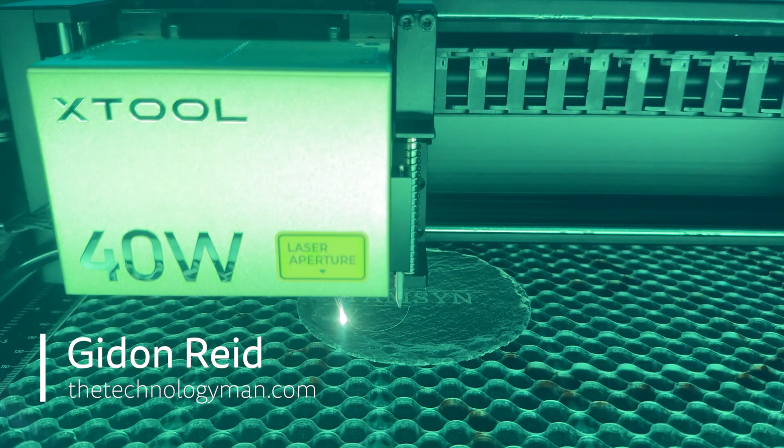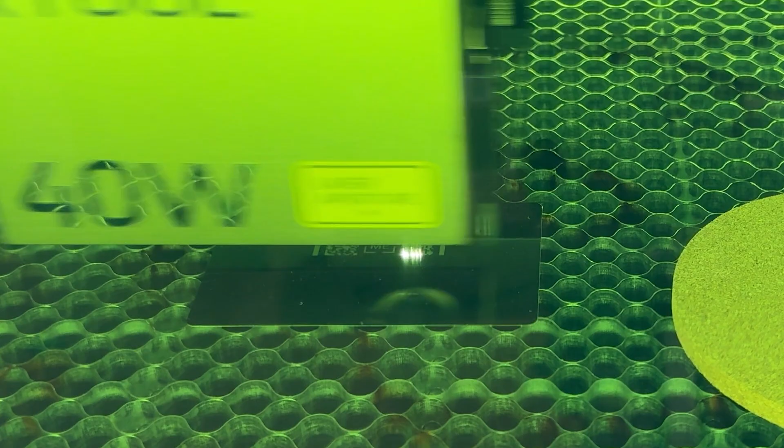The xTool S1 40W is the most impressive and safest laser I've reviewed so far. It can cut wood up to 20mm thick and engrave at 36,000mm per minute or 600mm per second. And the laser module can move up and down on a motorised Z-axis, which combined with its built-in touch probe provides autofocus and a few other clever tricks.

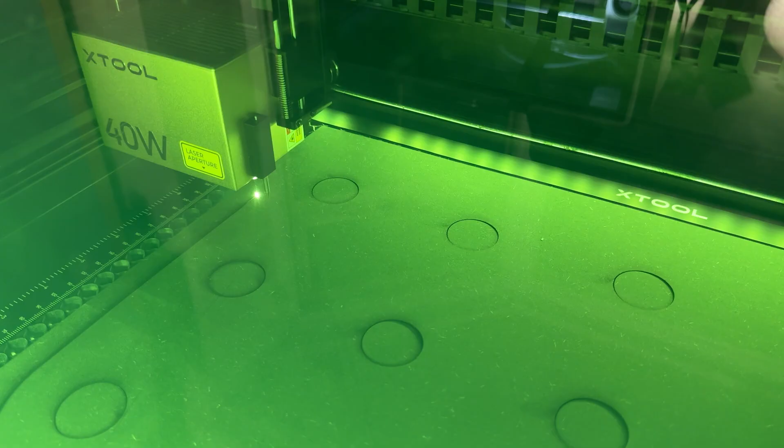Its integrated enclosure can only operate with the lid closed, giving us a Class 1 laser classification, comparable to a laser pointer you might use for presentations. And the enclosure has built-in fume extraction. I'll also be reviewing the optional xTool Air Assist, honeycomb bed and riser base.

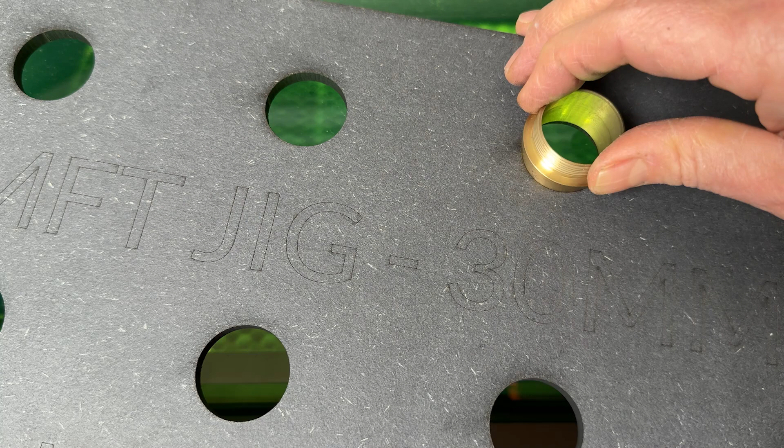I'll put all xTool's claims to the test and show exactly what this machine is capable of to see if it might be the right laser for you. So let's take a closer look. The xTool S1 comes in a large box, very well packaged and almost completely assembled. You should be up and running in 30 to 60 minutes.

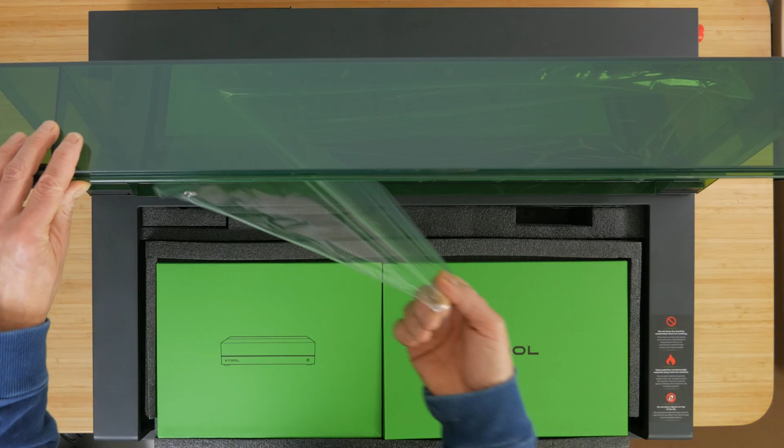I'd recommend following xTool's unboxing video, but there's also a nicely produced full colour A4 user manual in the box. There are two wide Velcro straps that you use to extract the entire machine from the packaging. All the extras are contained within boxes inside the machine itself. There is some very basic assembly.

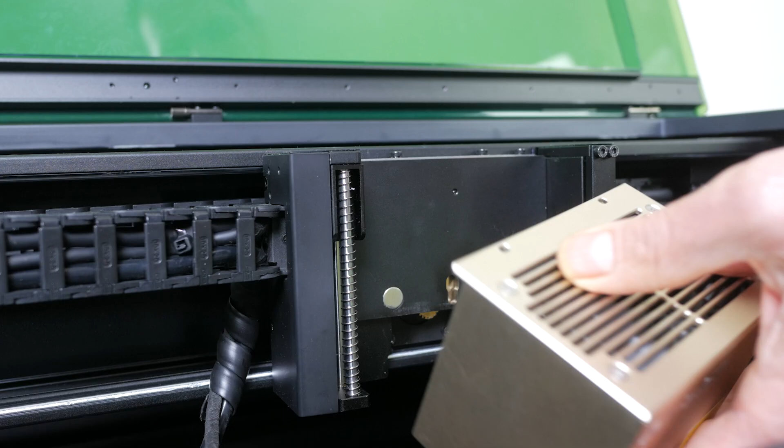First you need to remove the two back side stops to prevent the gantry moving in shipping. Then you can attach the laser module, which is held in place with two bolts. Plug in the cable and air hose to the laser module and attach the autofocus depth probe, which snaps into place with magnets, so it can easily detach itself in case it gets snagged on anything.

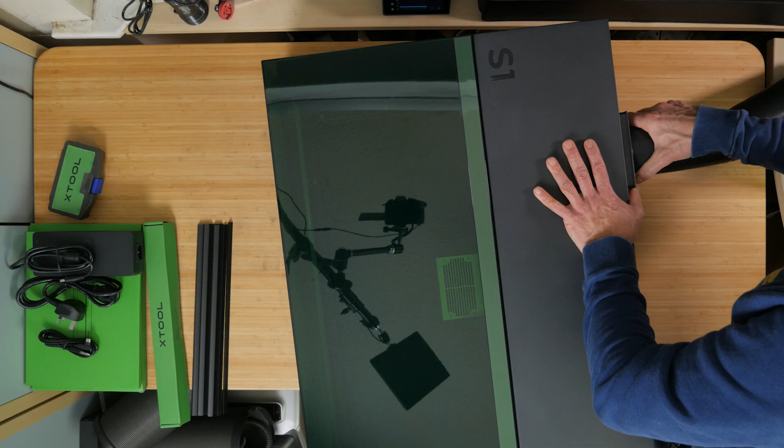You can then remove the fan cover to install the included 76mm flexible hose and adapter in its place. This hose is only around 1 metre when fully extended, which is a little on the short side. If you have a window close enough, you can use this hose to exhaust smoke out of the window. I'll discuss other options shortly. You'll definitely need some sort of fume extraction if you're going to do any cutting with the S1.

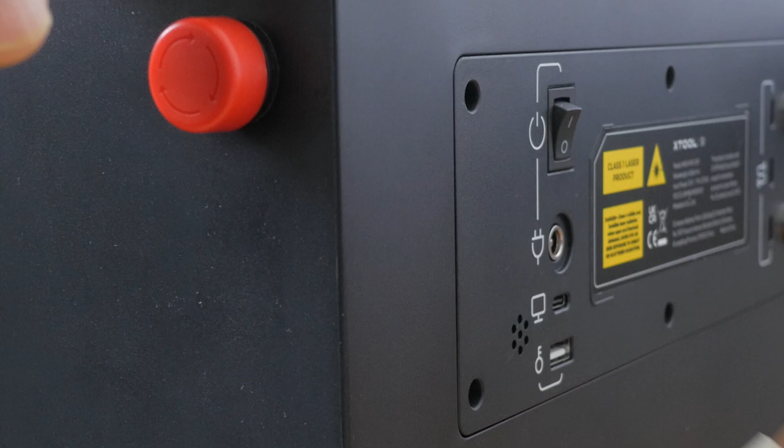Finally, you can install the USB key around the back, plug in the hefty 275 watt power adapter, release the emergency stop button and turn the machine on. You won't be able to operate the machine without the USB key in place. Luckily, xTool does provide a spare.

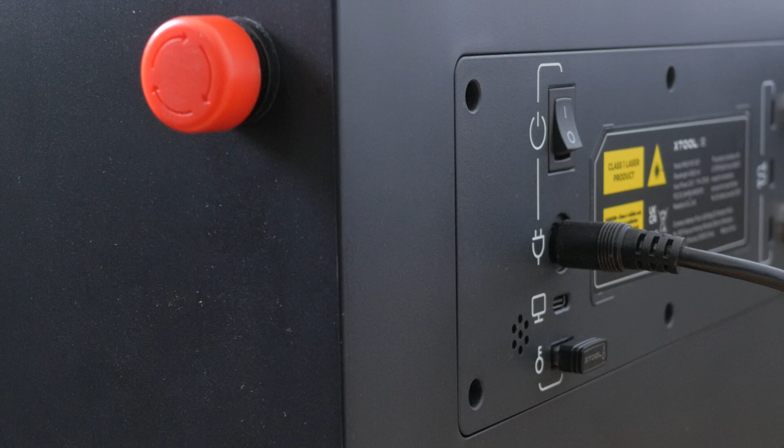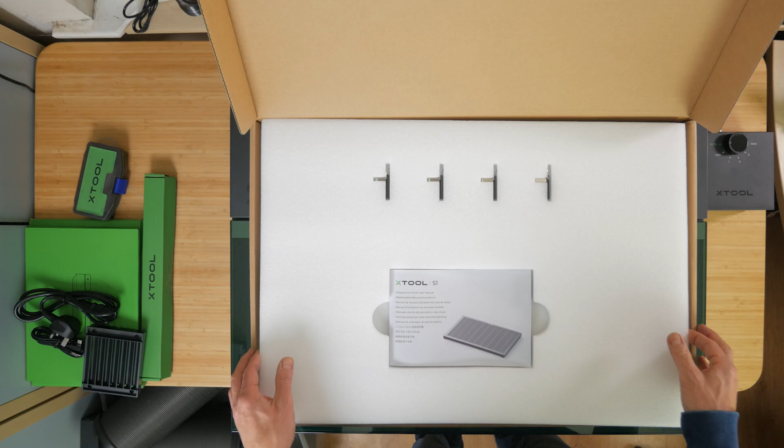The machine also comes with a small pack of material samples, 2 spare lenses, a hex screwdriver, some grease and a set of triangular prisms to use when cutting if you don't have a honeycomb base. My machine bundle did come with a honeycomb base as well as the air assist pump and the riser base, which I'll discuss shortly.

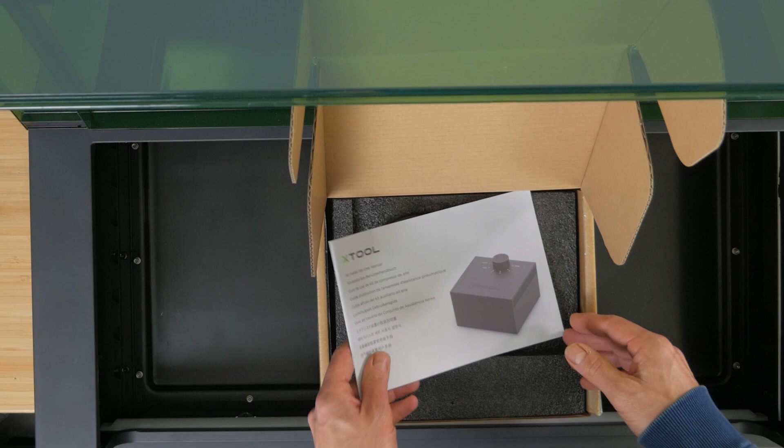I'd consider some sort of air assist essential for cutting, and even for engraving it keeps the laser lens cleaner. This is the smartest looking air pump I've seen and plugs directly into the machine. It doesn't need an additional power supply. It would be even better if the pump was somehow integrated into the machine though. It uses a standard 6mm hose, so you could use another pump if you have one, but you'd lose the automatic features of the xTool one that I'll come back to.

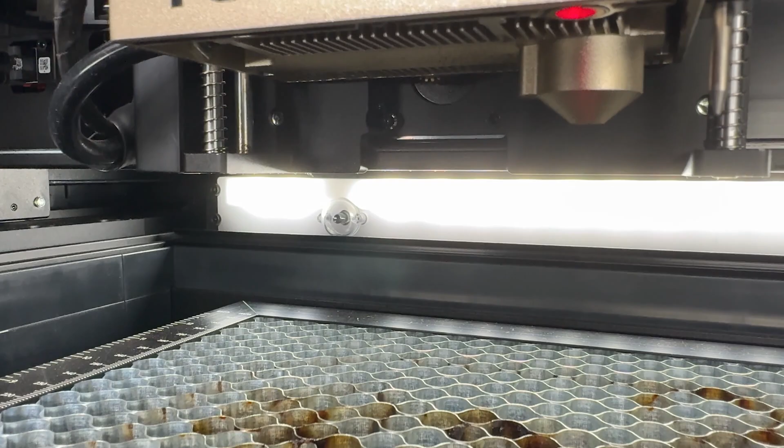The power cable for the air assist looks like a USB-C cable, but it's a proprietary connector and has to be inserted the right way around. This is a very attractive looking machine and has bright LED lights at the front and back that are useful for positioning your materials. The cabling is immaculate and all tucked away neatly, a far cry from some diode lasers I've tested in the past.

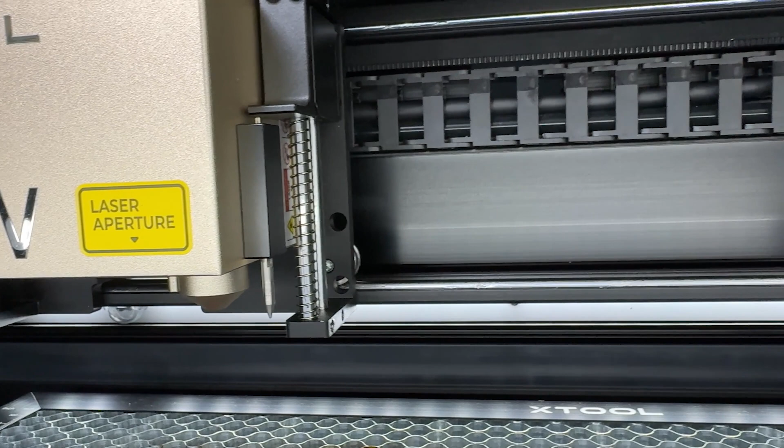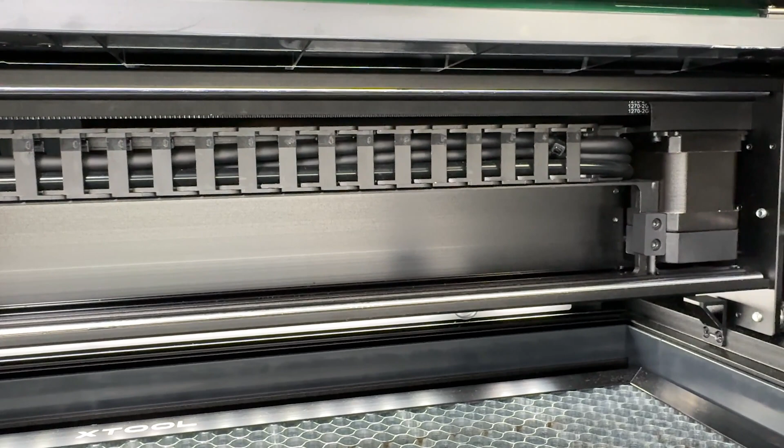You can use the S1 with xTool's free XCS software or Lightburn if you're prepared to lose some functionality, which I'll mention as we go. I tested the S1 with both, but I'd recommend at least starting off with XCS. Apart from anything else, you'll need to connect it to XCS for firmware updates.

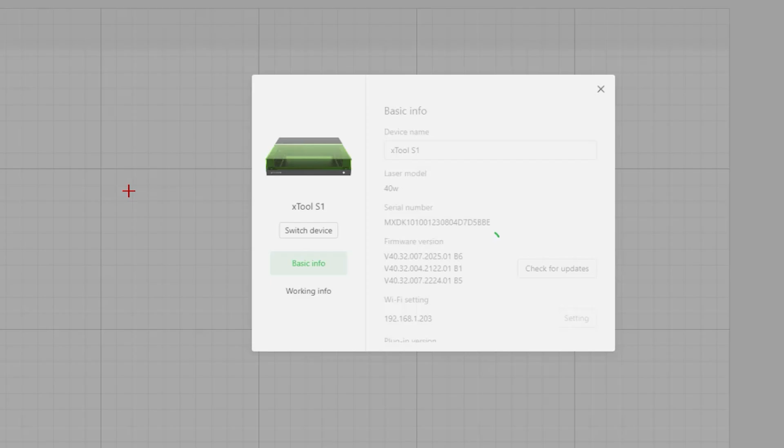Connect the supplied USB-C cable to your laser and computer and open up XCS. Click on Connect Device in the top right and accept any firmware updates. At this point you can switch the machine to use the S1's built-in Wi-Fi from the settings menu. Most of these settings you can leave at their defaults, but I changed the exhaust time after processing from 10 seconds to 30 seconds to give the machine as much time as possible to clear any smoke and fumes before you open the lid.

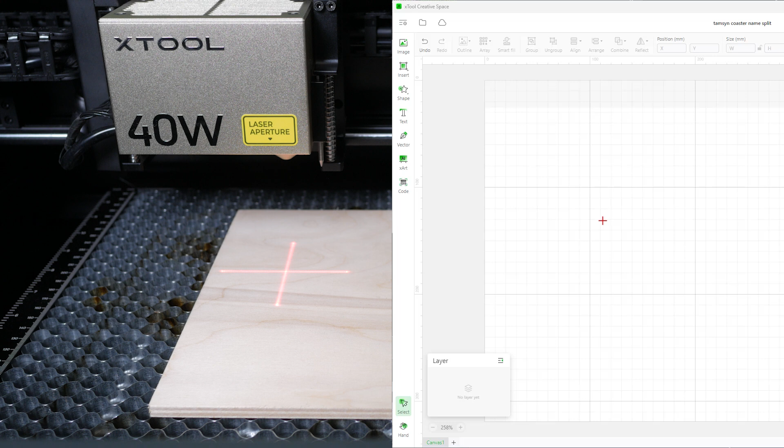Arguably the most useful feature, which only works in XCS, is the real-time coordinate system. A red cross in XCS displays the exact position of the laser module, even when moving the laser by hand. This makes lining up jobs very easy. You can position the laser where you want on your workpiece, then drag the artwork to the red cross in XCS, which will snap into position. This feature also provides further benefits I'll cover in the next section.

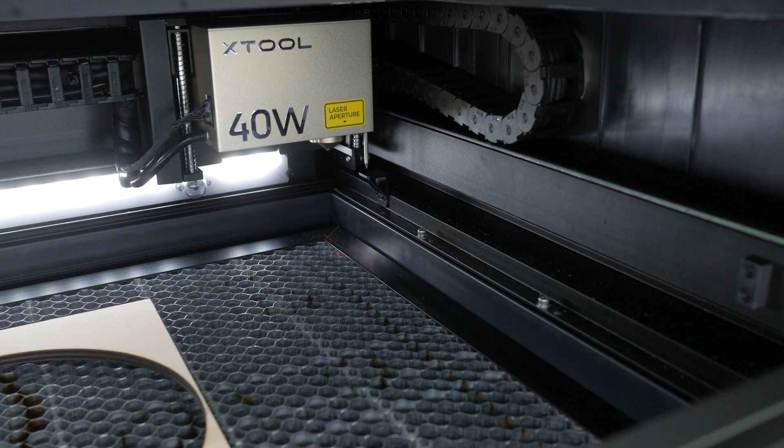The autofocus adjustment is another time-saving feature I've not seen since I looked at the Two Trees TS2 a while back. The laser module sits on rails driven by a stepper motor. When you press the auto measure crosshair in XCS, the depth probe on the side of the machine is ejected and the laser module is moved down so the probe just touches the workpiece to set the exact height and therefore focus. The laser module then moves across to the back right of the machine to reset the probe. Make sure the red laser crosshair is over your workpiece before starting the process.

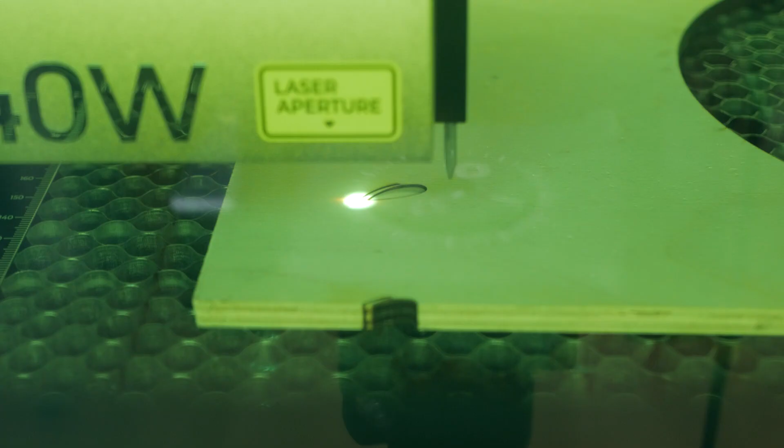My S1 comes with a 40 watt laser module, but a 20 watt module and a 2 watt infrared module for engraving metal are also available. With the 40 watt module, you get a usable cutting area of 498mm by 319mm, which is similar to the xTool D1 Pro I looked at recently, but more of a rectangle than a square. The 40 watt module has a spot size of 0.08 x 0.1mm, which is pretty good for a 40 watt laser, and smaller than the spot size on the 40 watt module on the D1 Pro. This should make it possible to engrave and cut more intricate designs.

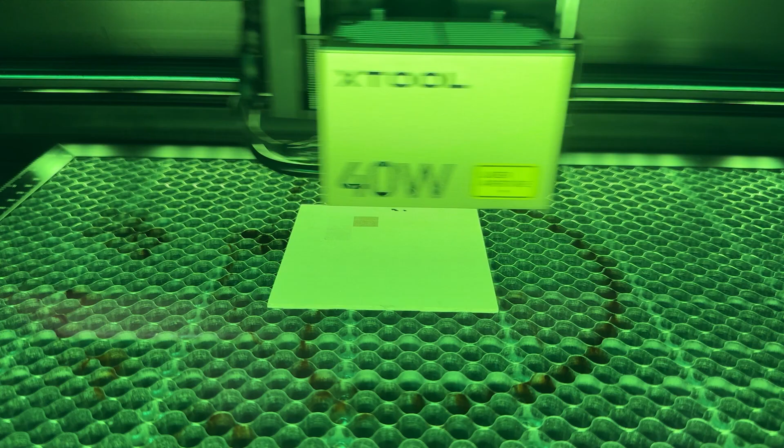In my testing I didn't notice much difference compared to my 40 watt D1 Pro. Both machines can engrave and cut with enough detail for my requirements. The S1 is considerably faster than the D1 Pro though, and one of the fastest lasers I've tested. It can reach speeds of 600mm per second or 36,000mm per minute, which is comparable in movement speed to a CO2 laser like the xTool P2.

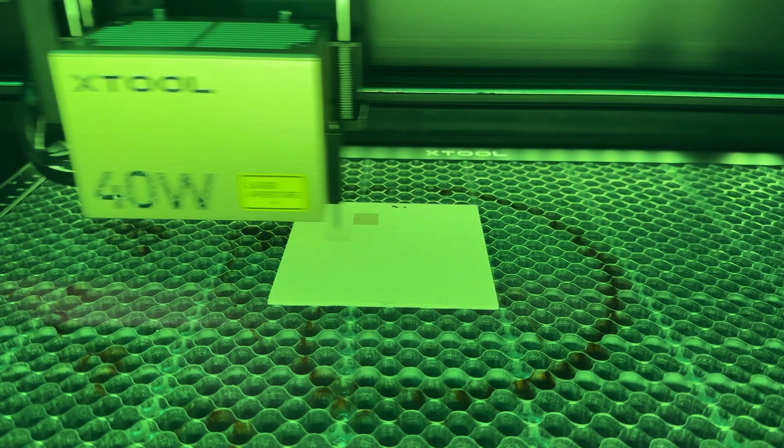I started off testing engraving with the S1. I printed a material test grid on some plywood to see just how fast this machine is. Once you've sent the job to the laser, you'll be prompted to press the front button to start the job. Its higher speeds only really make sense for bigger jobs. For this small test grid, it's actually faster engraving at 300mm per second than at 600mm per second, where it has to significantly overshoot the engraving to accelerate and decelerate to and from its maximum speed. But even on a not particularly stable worktop, the machine is smooth and refined in operation.

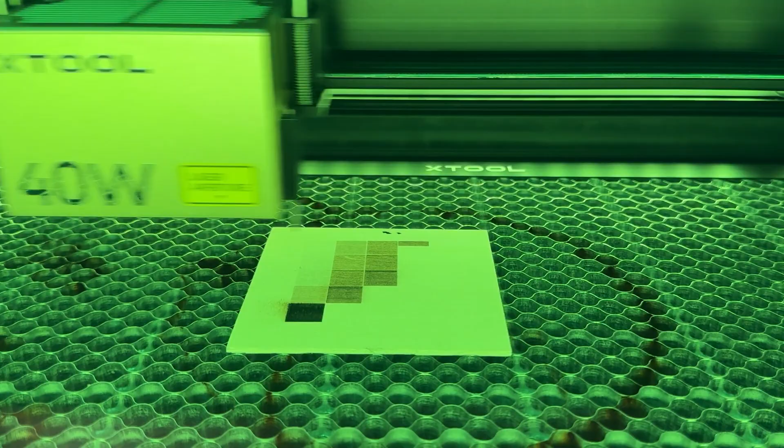Next I tried engraving a round slate tile. Unfortunately the S1 has no built-in camera for alignment like the P2, but it does have an arguably more accurate way to position your artwork on your material if you're using XCS. First set the focus of the laser as before, then click on Start Marking under Mark Processing Area. You have a choice of rectangle, circle, polygon and straight line, but you can change this selection in the next screen if you want. Manually move the laser module to one edge of the slate and press the front button of the laser.

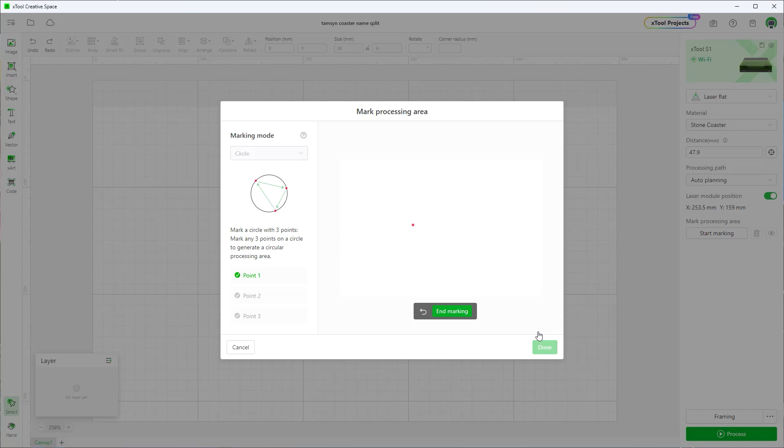Move to another edge of the slate and again press the front button. Do this one last time on another edge to complete the marking and then click on End Marking. Click on Done and you'll see the exact position of the tile in your workspace.

The machine does beep very loudly when you press the button for marking and starting jobs. Fortunately you can turn off buzzer reminders in settings if this annoys you.

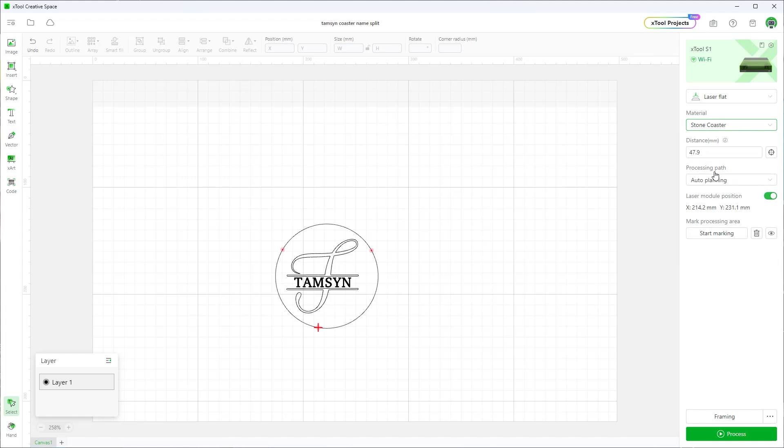Prepare your artwork and resize it to fit the tile, then drag it to the slate outline. It will snap to the centre of the tile. It couldn't be easier and it makes the S1 a real pleasure to use. You could do something similar in Lightburn, but it's not as intuitive and you don't see the live position of the laser in your workspace.

xTool provides settings for a few materials, including a stone coaster, which I selected. I chose the score, which is basically the same as cut, but with lower power and faster speed. I tried to add power and speed settings on screen for all the materials I've engraved and cut.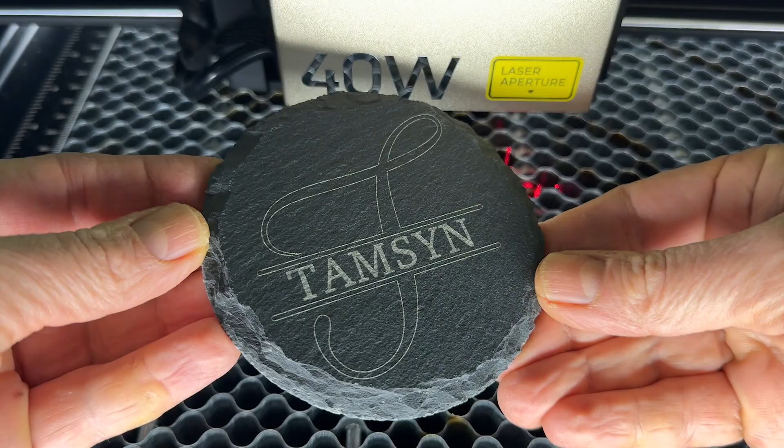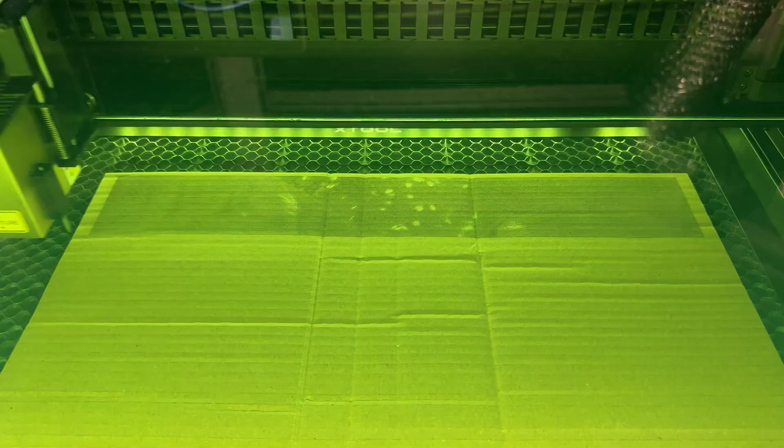This coaster came out pretty well with xTool's default settings, as did an image I did of a deer on some plywood. Here I also cut out a circular coaster from the wood after the engraving. To properly test the maximum speed, I lasered this same image using almost the entire working space of the S1, which took around 30 minutes.

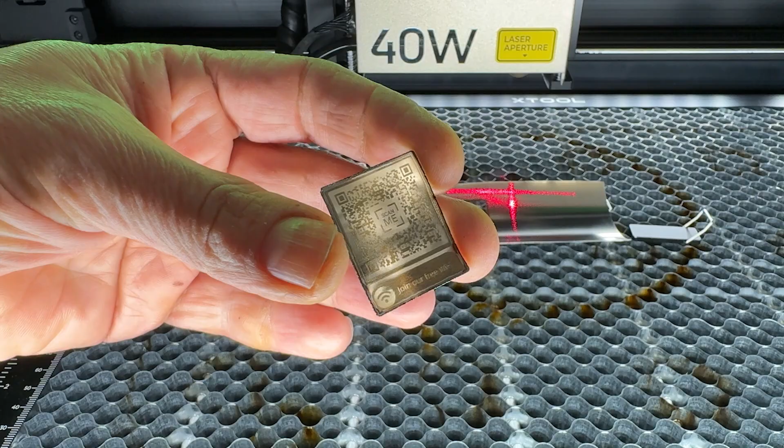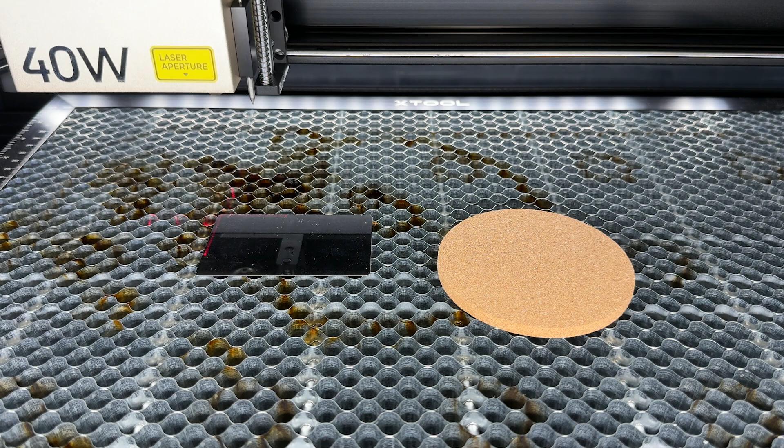I also tried engraving leather, cork and stainless steel, which all worked as expected, and I got comparable results to my D1 Pro with similar settings. The marking feature in XCS can also be used to set up batch jobs. As before, go into the marking menu and select your first marking area mode. Here I'm selecting rectangle for this metal coated business card.

In its default highest home position, the laser is usually too far from the workpiece for the red alignment crosshair, and it will appear quite blurry, which makes accurate alignment tricky. I like to drop the laser a couple of centimetres for a sharper focus and more accurate alignment. Just remember to home the Z-axis again when you're done to return it back to its original position. You can access the controls from the bottom right of the XCS screen. I hope there's a firmware update from xTool to do this for you.

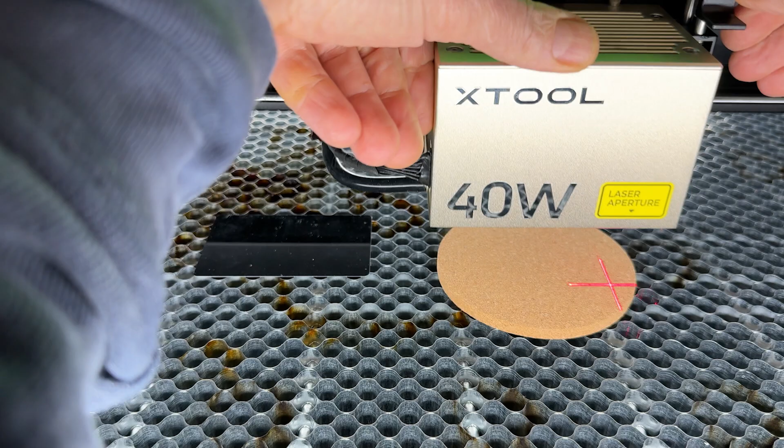After marking the rectangle, click on End Marking. You can now continue adding marking areas. Here I'm selecting Circle to mark this cork coaster. I'm not sure what the limit is here. I tried marking 10 areas without any issues. It's quick moving the laser with your hand, but I'd like to see some software controls to move the laser more precisely here in the marking window.

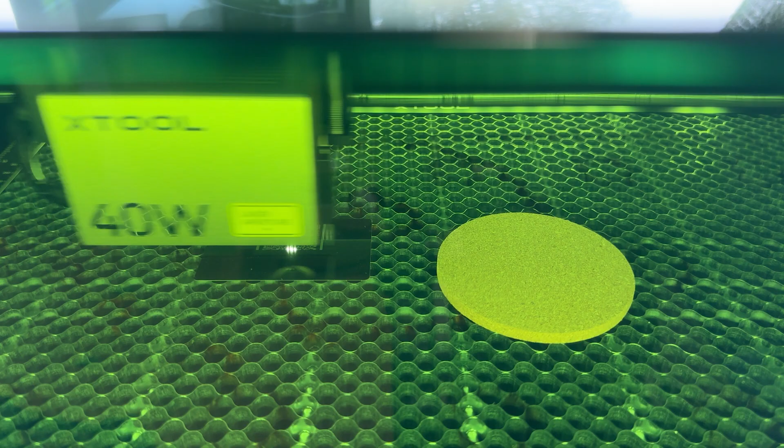Click Done to return to the XCS work area. You can now drag your various artwork into the marked areas. I made things a little difficult for myself here, with the cork coaster being much thicker than the business card. I had to laser both jobs separately, resetting the focus distance for the coaster. But both jobs came out pretty well.

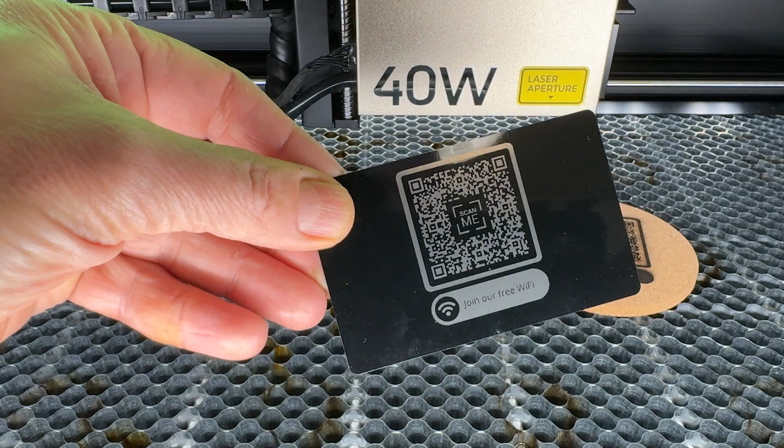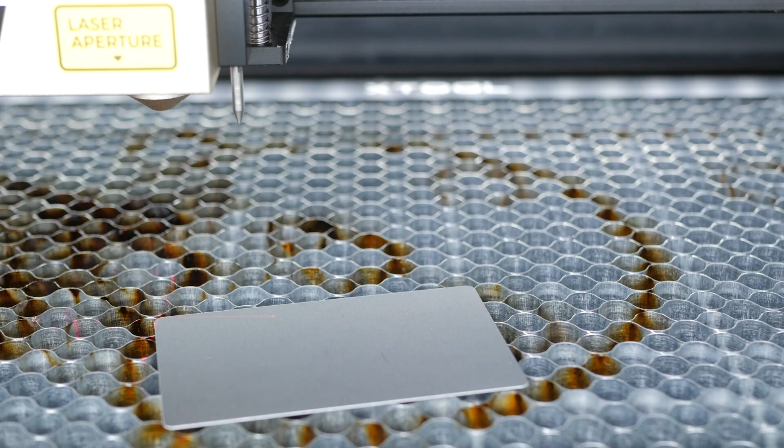I used the built-in XCS settings for the business card, which came out fine, but the cork coaster was a little burnt with the same settings. Upping the speed to 300mm per second looked better. For the best results, you do need a little time getting square or rectangular jobs exactly parallel and perpendicular to the gantry. Or you could use the polygon marking area, which will take into account any skew by measuring all corners.

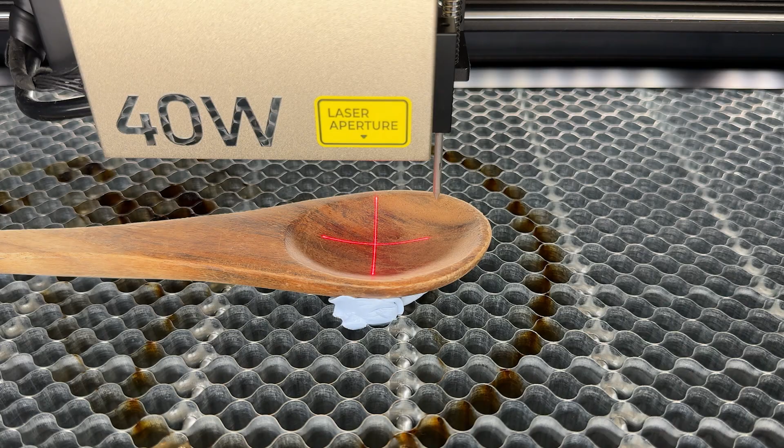The S1 can also engrave uneven surfaces using its automatic focusing system. I tried this feature on a wooden salad spoon. First off, you need to make sure the object is secured. I used some Blu Tack. You also need to make sure there aren't any abrupt depth changes or angles greater than 15 degrees, or the process may fail. In XCS, you need to change the laser setup from laser flat to curve process.

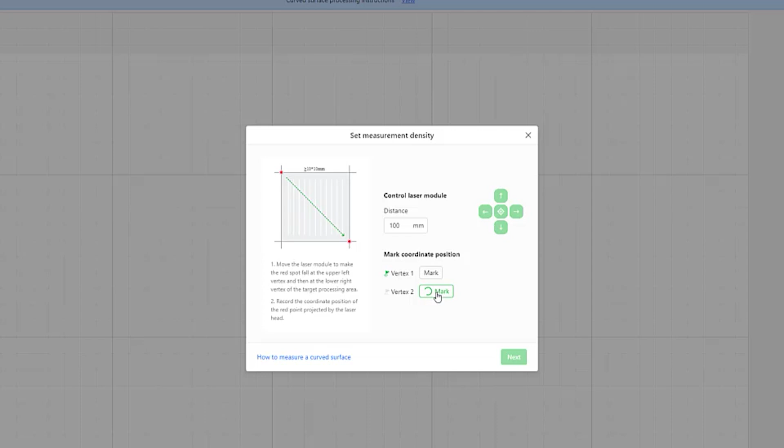Click on Curve Measure and mark the two corners of the area you want to probe. Here you do get controls for the accurate placement of the laser, or you can just move it by hand. You then choose how many points you want to probe before starting the measurements.

I left it at its defaults, and the machine went about probing and measuring a 4x4 grid. You can see a 3D preview of the final resulting mesh, which you can move around with your mouse. I use the smoothness and tension sliders to add detail to the mesh via some sort of interpolation.

You can then drag and position your artwork in the defined work area, choose your settings and send it to the laser. The laser module moves up and down on its Z-axis to keep the focus precise, and the resulting engraving looks pretty good.

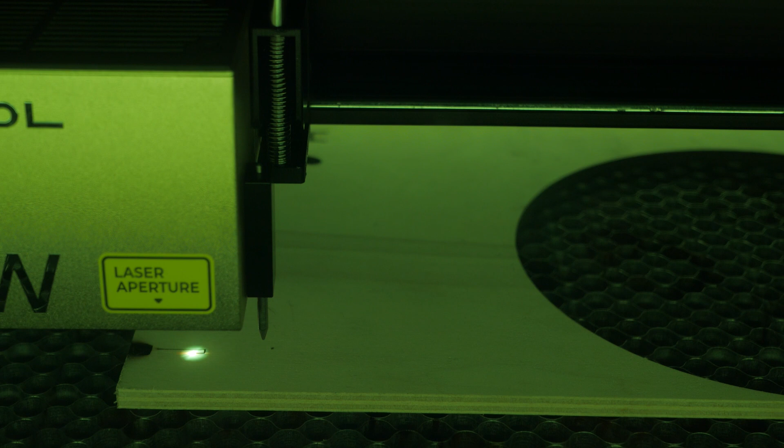Next I tried cutting with the S1. I got similar cutting performance to the xTool D1 Pro, also with a 40-watt laser module. But there are some key advantages. I do use a D1 Pro with its custom enclosure, but the enclosure on the S1 is on another level. Most importantly, the laser won't operate without the lid being closed, which actually makes the S1 a Class 1 laser, comparable to a laser pointer you might use for presentations, so much safer than your typical diode laser.

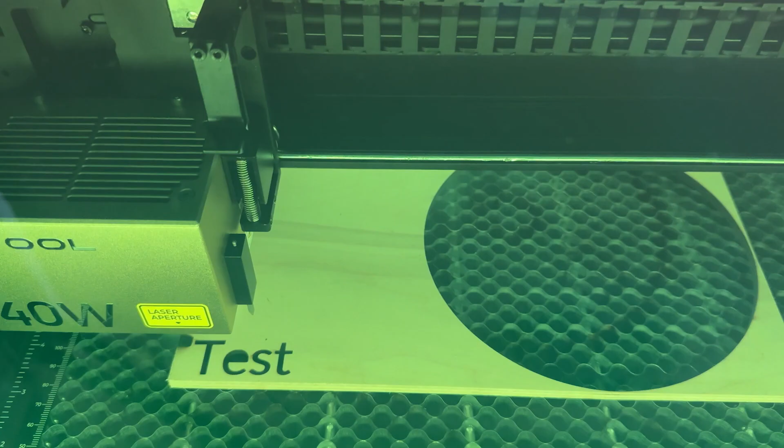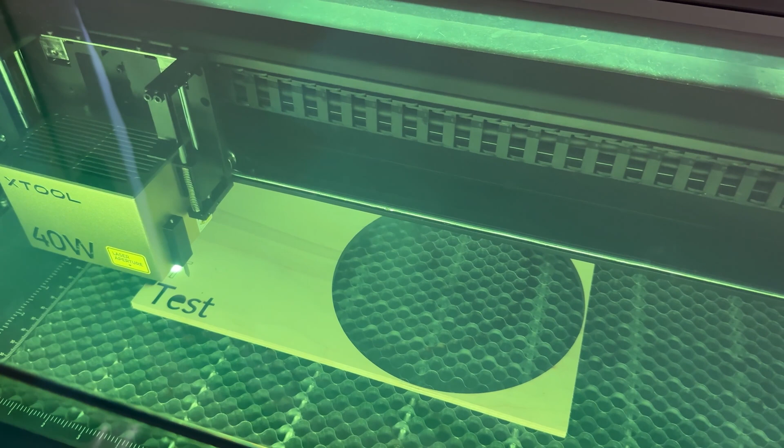The other advantage of this enclosure is the visibility. The laser-safe acrylic lid covers a good proportion of the laser bed, and together with the built-in LED strip, it's very easy to see what's going on. It also makes the machine fairly quiet, which I'll discuss more later.

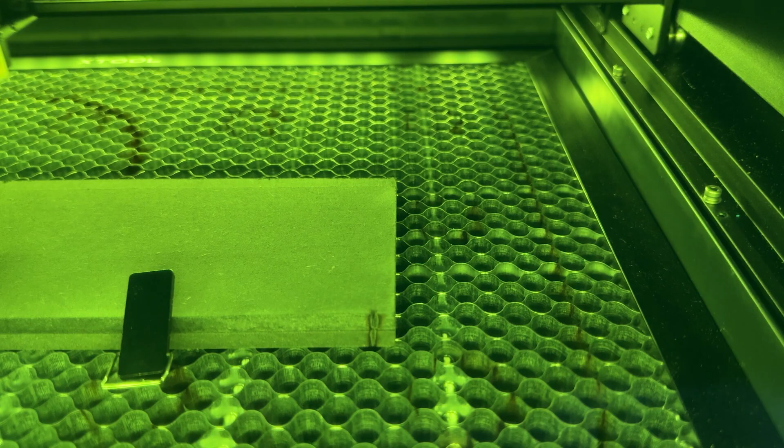There are a few other safety features on the S1. There are built-in flame detection sensors that will stop the laser if they detect a flame. This is the first laser I've tested where these sensors actually work. I was cutting some stacked 6mm black MDF a little too slowly, and I could see the MDF was starting to catch. The sensors did indeed trigger, and the machine stopped and beeped continuously.

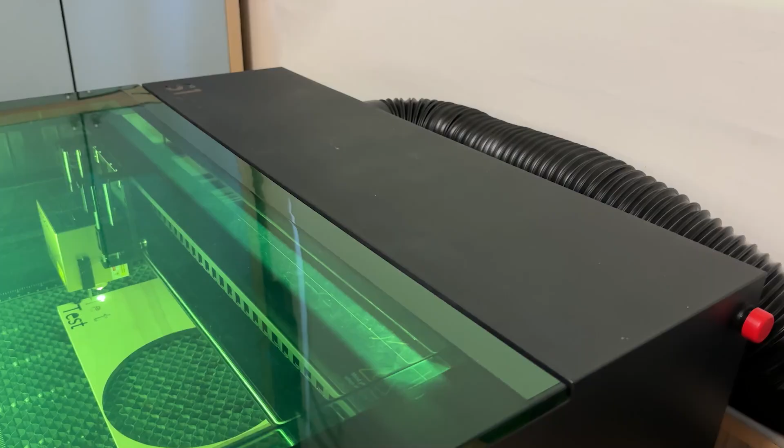There's also the usual tilt and impact detection, which will stop the machine if it's tipped or knocked. The only slight oddity on the safety front is the red emergency stop button is right at the back on the side of the machine. This should be much more accessible, but at least the front button can pause the machine.

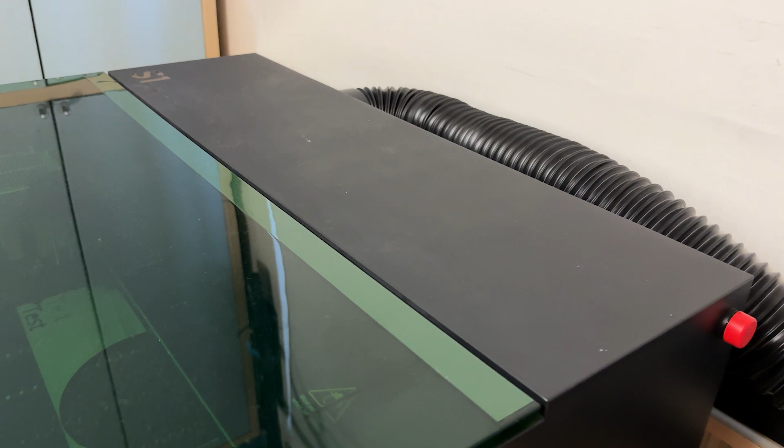I tried cutting a variety of materials, mostly using the honeycomb bed, which is far more convenient than the supplied triangular prisms. It also comes with 4 useful low-profile magnetic hold-downs, which are excellent for thinner materials. As I alluded to already, cutting performance is very similar to the D1 Pro with a 40-watt module, which I reviewed recently, so you can take a look at that review for more examples of what a machine like this is capable of, if you like.

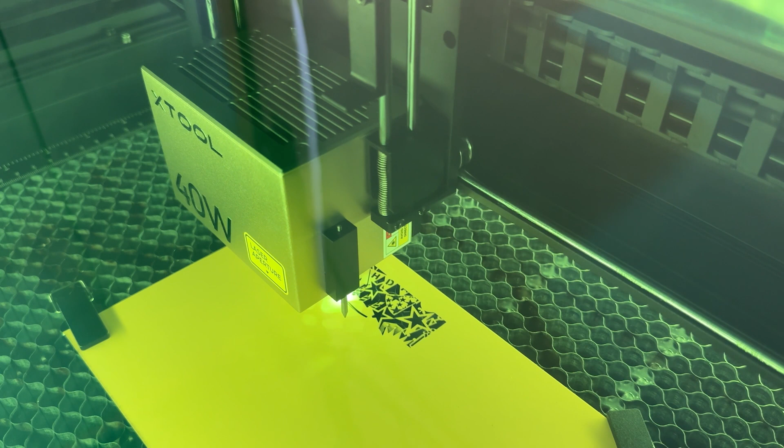One potential advantage of the S1 is the motorised focus adjustment. This allows you to drop the focus to cut thicker materials. In XCS, you can turn this feature on under Lower the Focus. xTool suggests starting with 3mm for thicker materials up to half the thickness of the material you're cutting, although it won't let you set more than 6mm.

I tried this feature with various materials of different thicknesses with varying offsets. I found 3mm was a sweet spot for most thicker materials, and I could get away with 6mm in some thicker softwoods to get the full 20mm cut. It definitely requires experimentation with your specific materials.

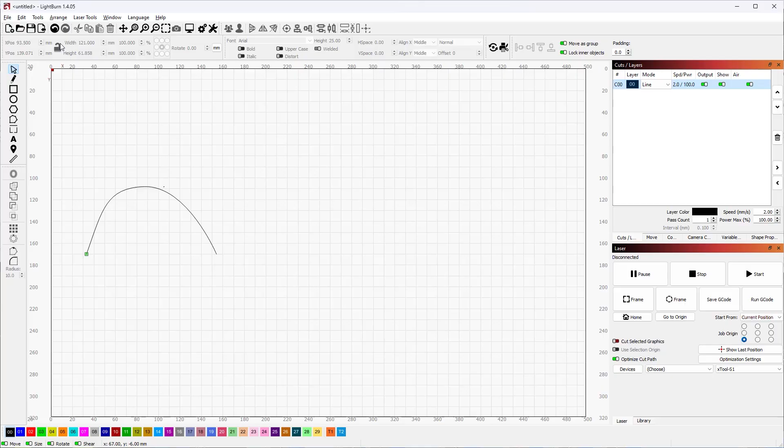It would be nice to have a feature that lowers the focus for multiple passes, perhaps dropping 1mm per pass, but that's not yet possible automatically in XCS. You can do this in Lightburn though. Enable Z-axis in settings, and then in cut settings enter the number of passes and the amount you want to offset each pass in Z-step per pass.

In XCS, a workaround would be to duplicate your cut path, assign each pass to a different layer and set a lower focus offset for each path. I tried these offset passes in XCS and Lightburn but got variable results. You need a very clean cut for the laser to penetrate through the existing kerf. I will try this with a little more air using my air compressor to see what's possible and report back in a future video or article.

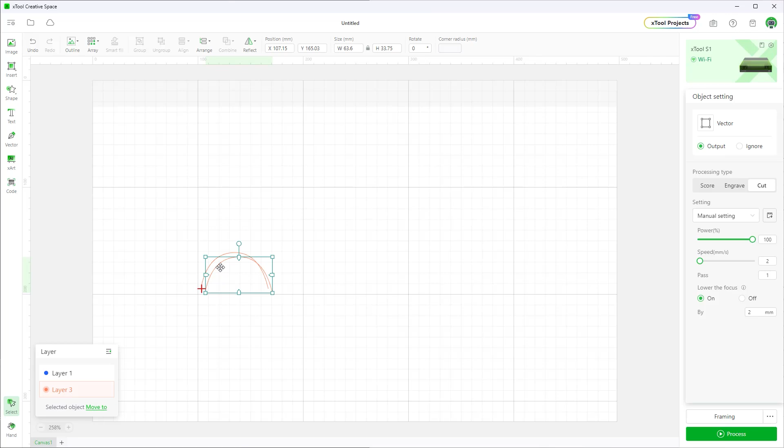I briefly mentioned the air assist, which is an optional extra with the S1. It's still only a 30 litre per minute air pump, but I do like its auto feature. By default, any cut will have the air at maximum, and engraving will drop the air output to 1. It's nice not to have to think about turning on the air assist or adjusting it for cutting and engraving. You can tweak these outputs in settings inside XCS, but the defaults work fine, and you can manually override them

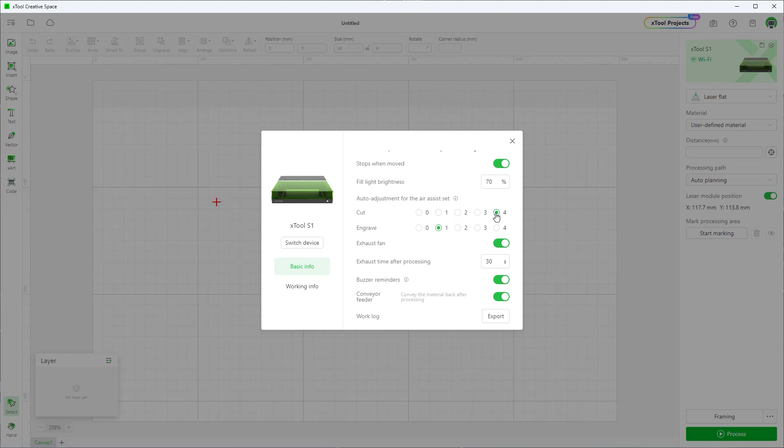with a large dial. xTool boasts the S1 can cut 20mm thick wood, 15mm black acrylic and 0.1mm stainless steel in one pass. I confirmed their claims in wood and stainless steel, but could only just cut through 10mm acrylic in one pass, and I wouldn't say the resulting cut would be particularly usable.

I always like to test these machines with a real project. I needed to replace the top of my Festool MFT I use for woodworking. This has a grid of perfectly CNC'd 20mm holes, exactly 96mm apart in 18mm MDF. You can use these holes for precise cuts using a track saw and machined stainless steel dogs that sit in these holes without any play. Festool charged an insane price for this top, so I went about machining one myself.

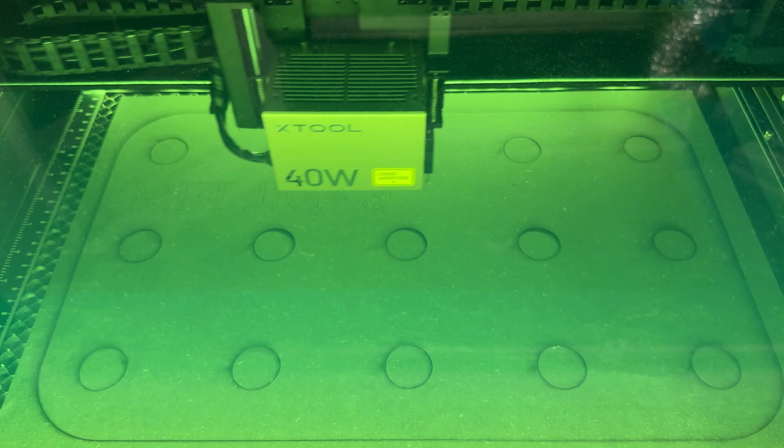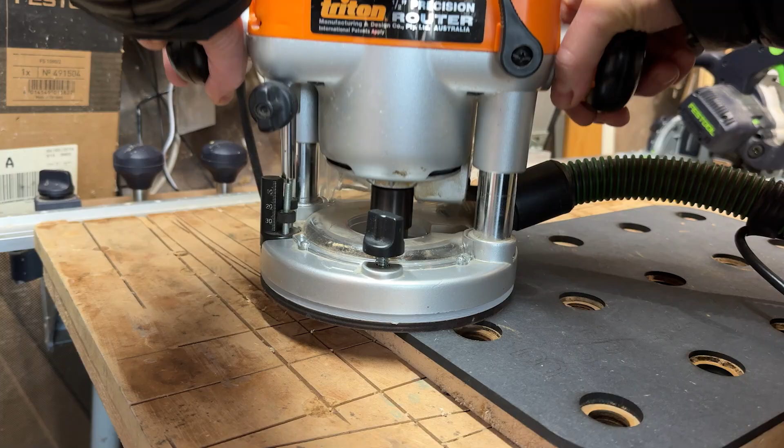I designed a template I could use to cut these 20mm holes with a router and a 30mm guide bush exactly 96mm apart and square to each other. I cut the template from 6mm black MDF. The guide bush of the router slots into the template with no play, and the template is attached to some MDF with double-sided tape. The holes can then be plunged with a 20mm bit in a router.

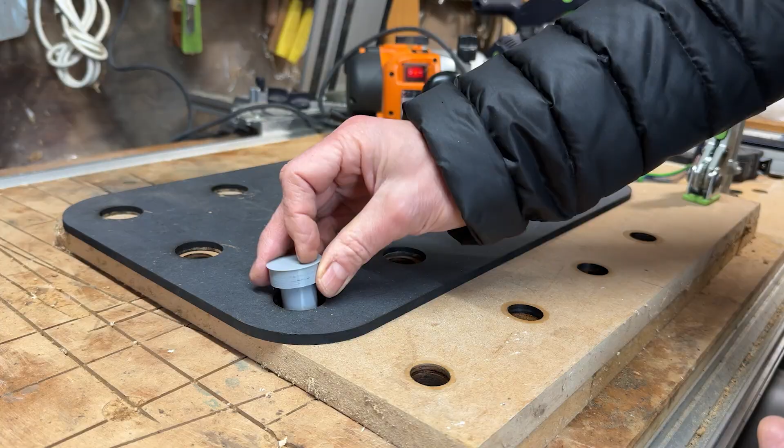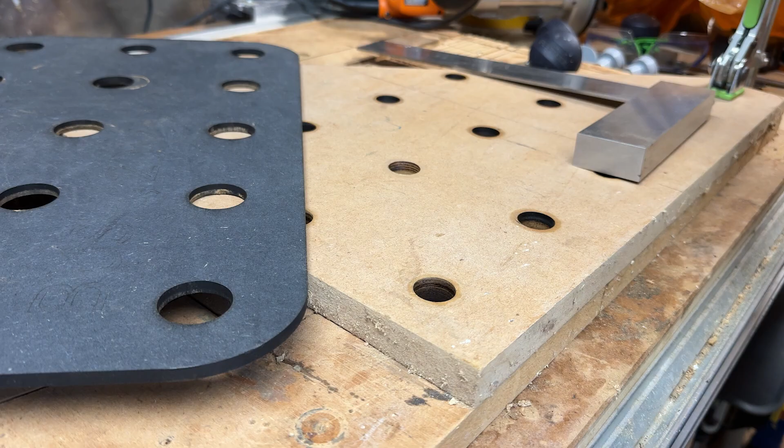I 3D printed some locating dogs to let me move the template around a larger piece of wood, keeping everything aligned. I also had to cut a base for the router to take account of the thickness of the guide bush. I cut this from 6mm birch plywood. I still need to make a few refinements, but this all worked pretty well and shows just how capable and versatile a machine like this is.

In version 2 of this template, I'll add some locating pins for perfect alignment of the first row of holes. I would ideally use 12mm MDF for the next version, but wasn't expecting even this 40W laser to be powerful enough to cut dense MDF at this thickness. But in a few test cuts it could. I just had to drop the focus by 3mm and it cut through in one pass, and this MDF measured just over 13mm.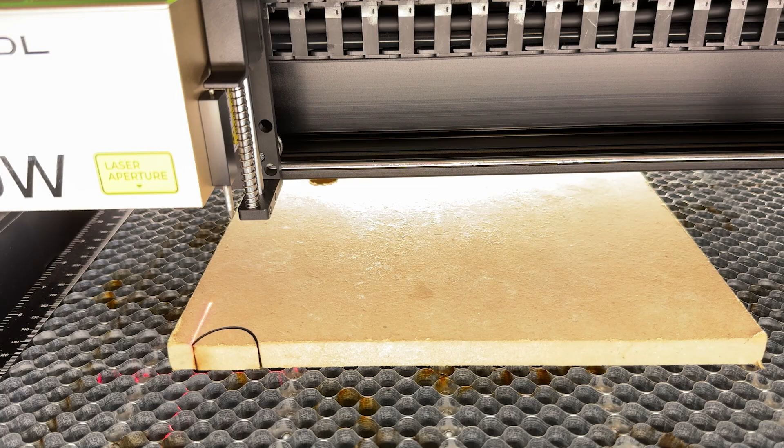I've not yet discussed fume extraction, which is essential for cutting. The built-in extraction fan does a decent job if you have a window close by, but for better results, especially if you're venting a little further away, you'll want an inline fan. I hooked up the S1's hose to my 6-inch extractor fan via a 3D printed adapter. I vent the machine to a window with around 3 meters of ducting, and the fan clears the smoke very effectively, as you can see. I have the extractor plugged into a smart plug so I can operate it with Alexa.

This does add some additional noise to the laser, although theoretically you could remove the noisier built-in fan. I measured 60 decibels 1 meter away with my decibel meter. That was the noise of the laser moving albeit slowly, the air assist at maximum output and the built-in extractor fan. This increased to 62 decibels when I turned the inline extractor on with Alexa. Even with a powerful extraction fan and the enclosed design, there are still fumes when cutting, so there is still room for improvement.

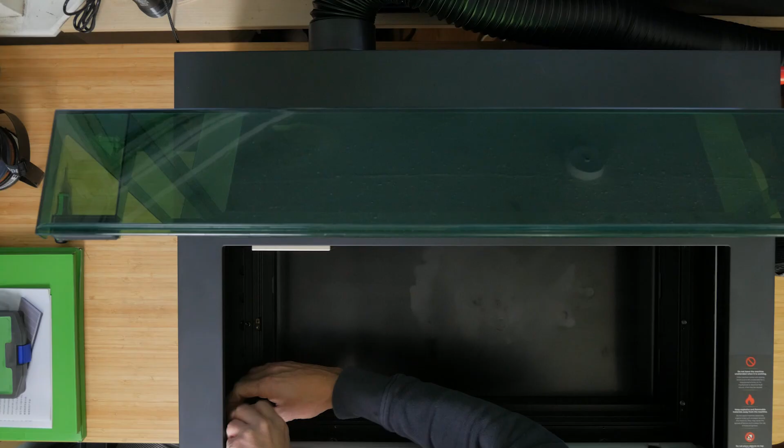With a standalone machine, material thickness is quite limited, especially if you're using the honeycomb bed. It can only accommodate 15mm of material with a honeycomb installed, or 42mm without for engraving. If you want more capacity, you'll need the optional riser base. You'll definitely need the riser base if you want to use the rotary or the automatic conveyor feeder, which allows cutting and engraving of material up to 3 meters in length.

Confusingly, there are 2 riser bases available, depending on where you are based. One which opens at the front for the conveyor feeder, and the one I have which is closed and doesn't support the conveyor feeder. The riser that has an opening comes with safety glasses and changes the machine from a Class 1 to a Class 4 laser, and isn't available in Europe, which means the conveyor feeder also isn't available here.

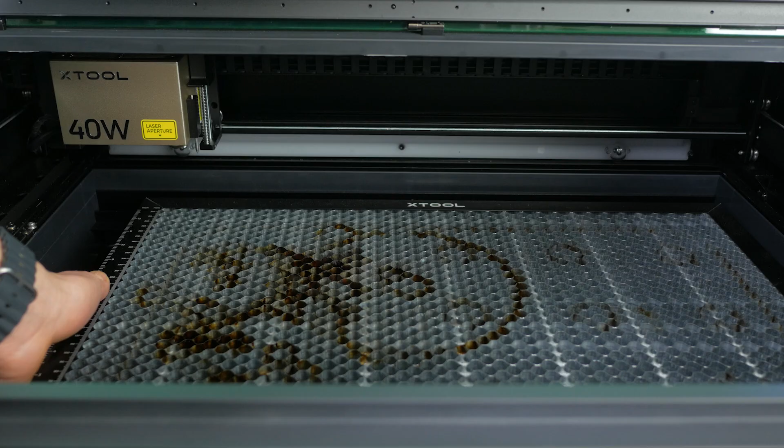I installed the closed riser, which is a fairly straightforward process. The xTool S1 honeycomb bed is pretty much an essential purchase if you go with a riser, since there's a 70mm minimum cutting and engraving height with a riser installed.

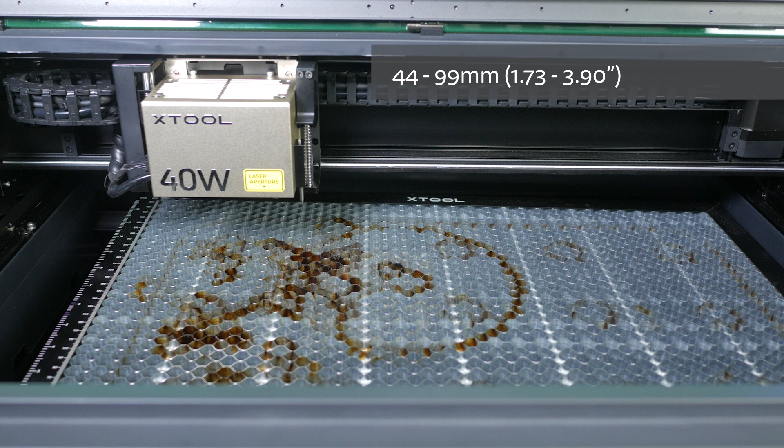Cleverly, the honeycomb bed can sit either on the base of the machine or halfway up on 2 supporting rails, front and back. With the honeycomb base in this position, you've got 0mm to 45mm capacity, and with the honeycomb lower to the base, you've got 44mm to 99mm of capacity. You can remove the honeycomb altogether for 125mm of capacity if you want to use the xTool RA2 Pro rotary attachment, which plugs into a port behind the front of the machine.

xTool have done a great job with the S1. It's the most capable, refined and most importantly safe diode laser I've tested so far. It would be very hard to go back to using your typical diode laser without an integrated enclosure. But of course all this comes at a cost. It's also the most expensive diode laser I've tested by some margin.

And that's before you consider the optional extras, many of which you really need to make the most out of the machine.

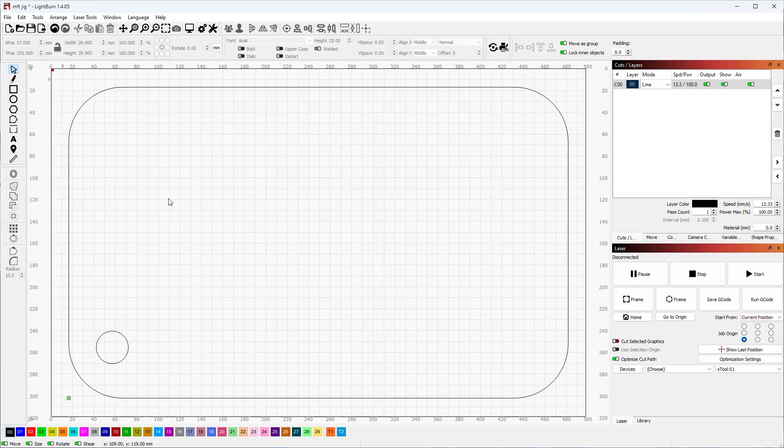xTool's XCS software has come on leaps and bounds since I first used it, but a lot of professionals will still prefer to use Lightburn. Although you can use Lightburn with the S1, you lose a lot of functionality, and I found operation of the machine a little flaky and inconsistent compared with XCS. For example, often the focus height would not reset and you have to redo the detect operation, as it's called in Lightburn. I do hope they improve the Lightburn integration over time.

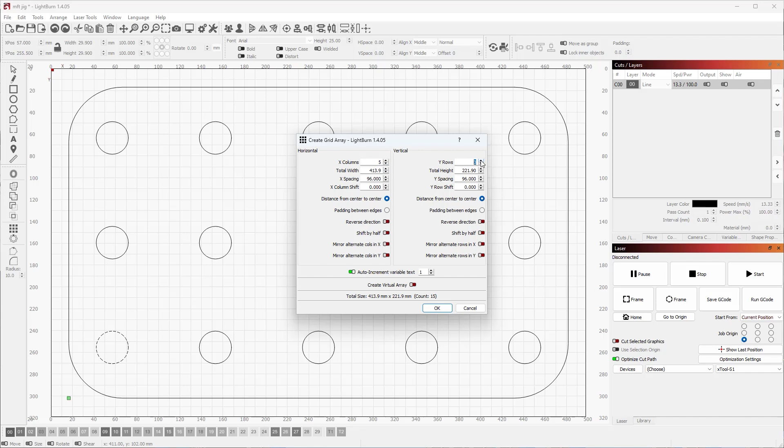I'll continue testing the S1 and I should be trying it out with the rotary tool and hopefully the 2 watt IR module very soon. I might get a chance to experience xTool support again too, which hasn't been necessary so far.